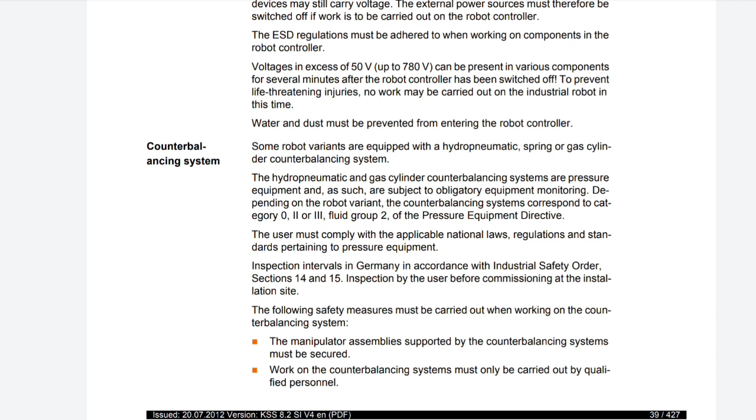Let's continue from the counterbalancing system. Some robot variants are equipped with a hydropneumatic spring or gas cylinder counterbalancing system. The hydropneumatic and gas cylinder counterbalancing systems are pressure equipment and as such are subject to obligatory equipment monitoring. Depending on the robot variant, the counterbalancing systems correspond to category 0, II or III, fluid group 2 of the Pressure Equipment Directive.

The user must comply with the applicable national laws, regulations and standards pertaining to pressure equipment. Inspection intervals in Germany in accordance with Industrial Safety Order, Sections 14 and 15. Inspection by the user before commissioning at the installation site.

The following safety measures must be carried out when working on the counterbalancing system. The manipulator assemblies supported by the counterbalancing systems must be secured. Work on the counterbalancing systems must only be carried out by qualified personnel.

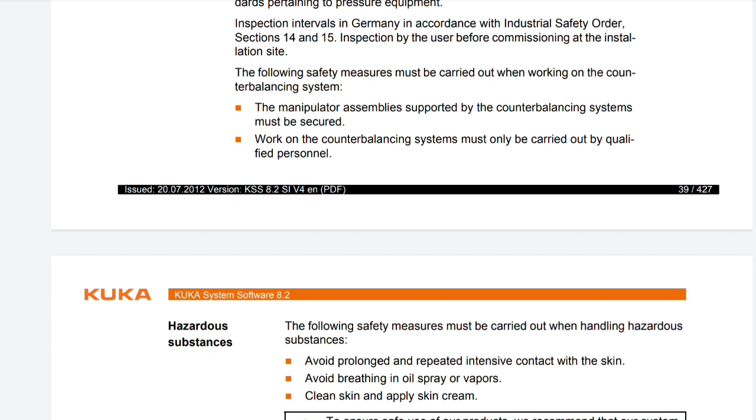Hazardous substances. The following safety measures must be carried out when handling hazardous substances. Avoid prolonged and repeated intensive contact with the skin. Avoid breathing in oil spray or vapors. Clean skin and apply skin cream. Use of our products: we recommend that our customers regularly request up-to-date safety data sheets from the manufacturers of hazardous substances.

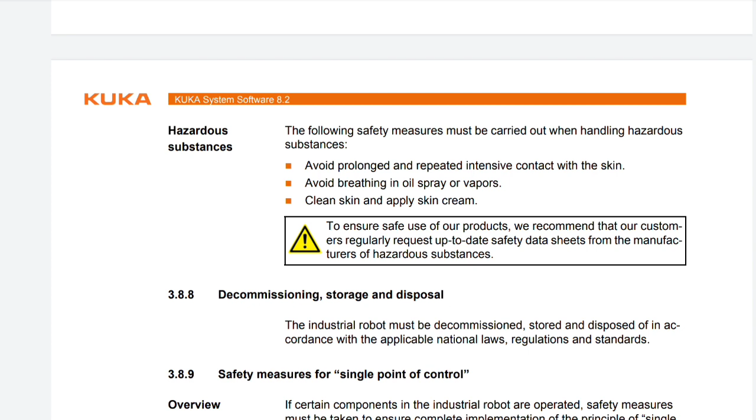Decommissioning, storage and disposal. The industrial robot must be decommissioned, stored and disposed of in accordance with the applicable national laws, regulations and standards.

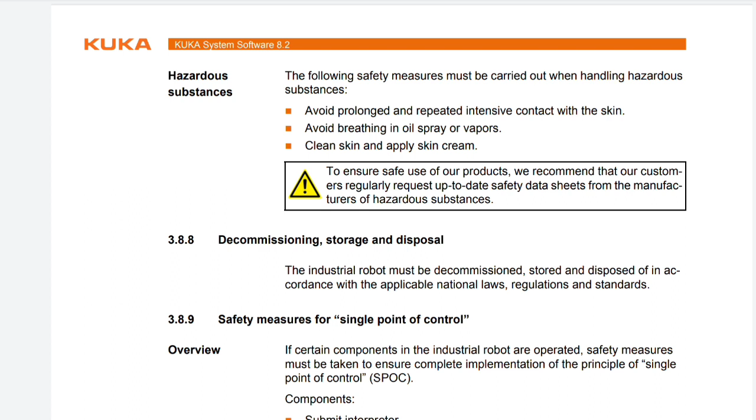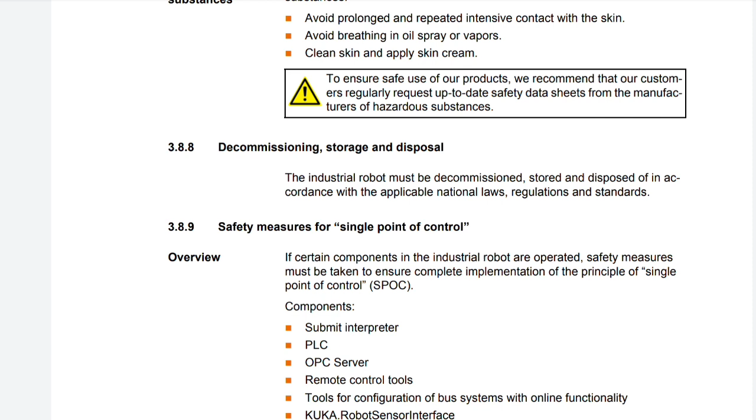Safety measures for single point of control. Overview. If certain components in the industrial robot are operated, safety measures must be taken to ensure complete implementation of the principle of single point of control. Components: Submit Interpreter (PLC), OPC Server, Remote Control Tools, Tools for configuration of bus systems with online functionality, KUKA Robot Sensor Interface.

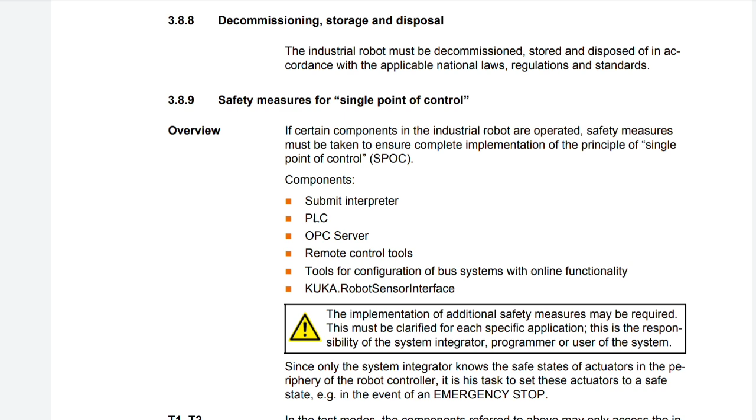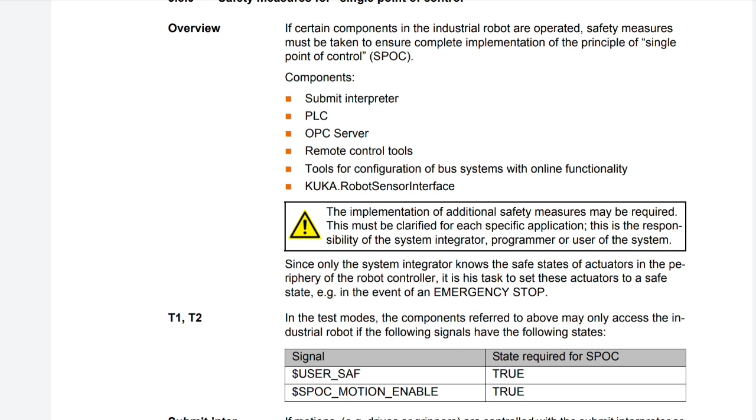The implementation of additional safety measures may be required. This must be clarified for each specific application. This is the responsibility of the system integrator, programmer or user of the system. Since only the system integrator knows the safe states of actuators in the periphery of the robot controller, it is his task to set these actuators to a safe state.

In the event of an emergency stop, in the test modes, the components referred to above may only access the industrial robot if the following signals have the following states. Signal state required for SPOC: $USER_SAF, true; SPOC motion enable, true.

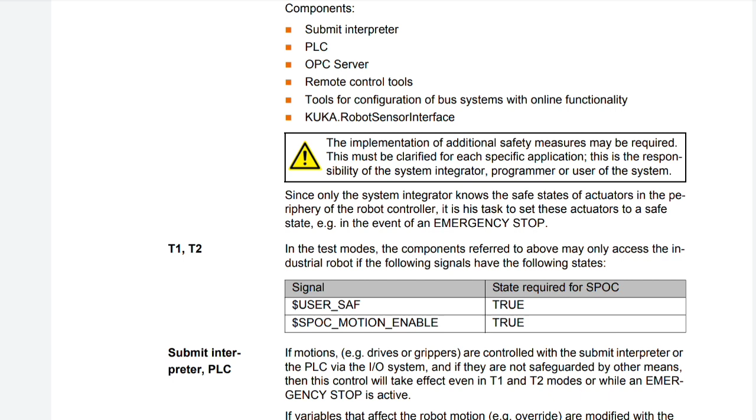Submit Interpreter, PLC. If motions, for example drives or grippers, are controlled with the Submit Interpreter or the PLC via the I/O systems, and if they are not safeguarded by other means, then this control will take effect even in T1 and T2 modes or while an emergency stop is active. If variables that affect the robot motion, for example override, are modified with the Submit Interpreter or the PLC, this takes effect even in T1 and T2 modes or while an emergency stop is active.

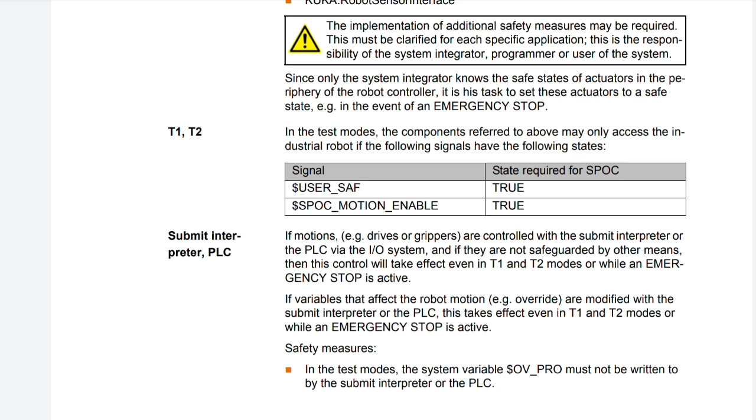Safety measures. In the test modes, the system variable $OV_PRO must not be written to by the Submit Interpreter or the PLC. Do not modify safety-relevant signals and variables, such as operating mode, emergency stop, safety gate contact, via the Submit Interpreter or PLC. If modifications are nonetheless required, all safety-relevant signals and variables must be linked in such a way that they cannot be set to a dangerous state by the Submit Interpreter or PLC.

OPC server, remote control tools. These components can be used with write access to modify programs, outputs, or other parameters of the robot controller without this being noticed by any persons located inside the system. Safety measures. KUKA stipulates that these components are to be used exclusively for diagnosis and visualization. Programs, outputs, or other parameters of the robot controller must not be modified using these components.

If these components are used, outputs that could cause a hazard must be determined in a risk assessment. These outputs must be designed in such a way that they cannot be set without being enabled. This can be done using an external enabling device.

Tools for configuration of bus systems. If these components have an online functionality, they can be used with write access to modify programs, outputs, or other parameters of the robot controller without this being noticed by any persons located inside the system. WorkVisual from KUKA, tools from other manufacturers.